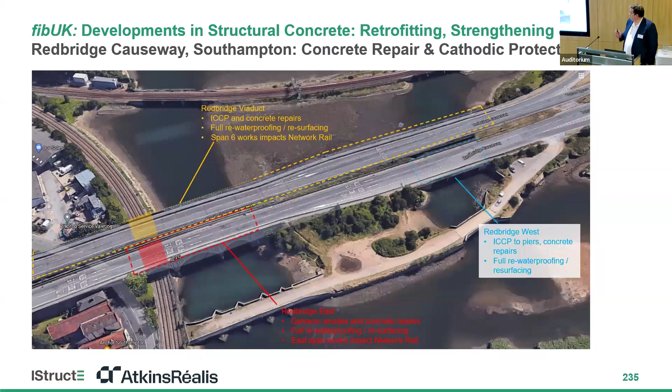Looking at the causeway itself, this is an aerial view. Southampton's to the left as you look at it, the New Forest to the right. So the main structure is Redbridge Viaduct - this is where we've done extensive cathodic protection and concrete repairs. We've also got Redbridge East, where we did galvanic anode protection and concrete repairs. And on Redbridge West, we've also done a full ICCP system to the piers and concrete repairs.

That's our compound - that's the only area available for our compound, so we're really constricted on land which we can use for the works. These are the two rail lines that we're bound by, just to make life a bit more interesting. And the client also wanted us to re-waterproof a fourth bridge at the same time.

Just going over the structures - the main structure, the biggest one, is a 20-span viaduct. It's a series of concrete beams, and the piers are continuous into the ground. We call them pile bents, where they come down the column, and that forms the pile foundation. Where those piers transition to on land, they become leaf piers with some post-tensioning, and that presented a number of problems for us when we do the cathodic protection.

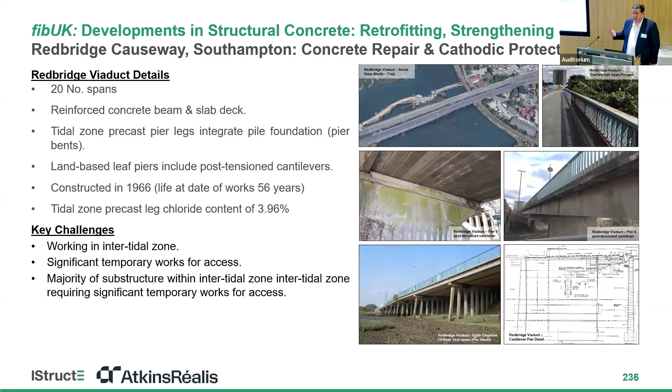The key challenge we faced is it was an early example of reinforced concrete construction on the south coast, and testing identified elevated chlorides in the pier legs. One of the key challenges is the part we need to remediate is in this intertidal zone with very fast flowing tides. So we need a lot of temporary works, which we'll show you in a minute, to address the works.

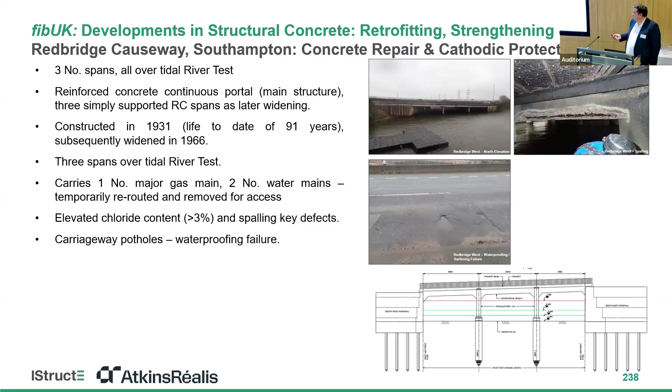Again, we've got major services and elevated chloride in the tidal spans. The final major structure is Redbridge West. As you can see from that top photo, there is no dry piece of land to get to it - it's all water-based work, making it more challenging. The majority of the structure is 90 years old, and the client was keen to extend that period. All the services on the other structures carry through on this one too. Same issues - elevated chlorides and spalling, and we had a number of potholes indicating the waterproofing had failed.

Just talking about the design challenges we had to overcome. The first one was actually getting to the structures to complete the work. As you can see from those two photos, there isn't a lot of dry land there, and that was one of our early considerations - how do we actually do the work?

With Milestone as ECI contractor, we developed a system of pontoons and quick demountable scaffold, which you can see in the top picture, which we could adjust as the tide came in and out, and that enabled us a much longer working window than just working at low tide.

The other issue we had is pontoons move - they move around with the wind, move around with the tide. So there's potential that when we're doing the breakout operation, a lot of debris would fall into the River Test, and that's really important because we've got the nature reserve nearby. So what we did is we developed a system of netting, which you can see in the bottom right-hand corner, to catch any debris when we were breaking out. Because that netting is flexible, it would move with the pontoon, going up and down with the tide.

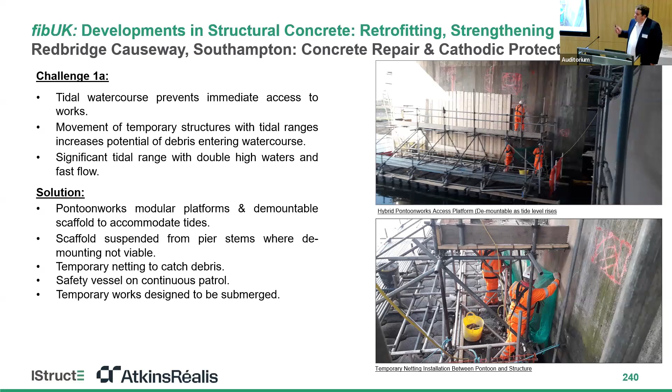The other issue where we couldn't use pontoons, we had to design the temporary works to be submerged, and we'll come on to show you some pictures of that. That temporary works design was particularly challenging because of the high flows that we had.

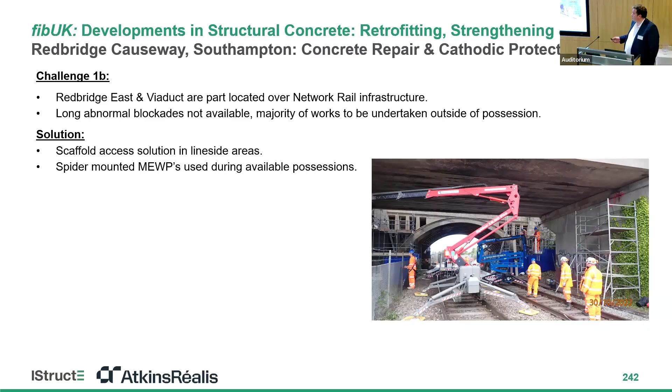The other issue we had was the working windows were very limited on the rail span, so we had to develop a way of getting in and out very quickly, getting the works mobilized and maximizing the possession window. One technique that we found particularly useful was the spider mounted MEWPs - if any of you have never used one, I highly recommend it on the railway, because they can be deployed and recovered very, very quickly, and they can adjust themselves to a range of different levels and ground conditions.

The next challenge we faced was that with all these different structures and the number of repairs we had, it was very difficult to identify how many overall details we would need. When we started counting them up, we were looking at thousands and thousands of different details we had to prepare, which isn't practical given the funding levels we get from our clients.

This was made even worse when we considered the phasing needed to maintain traffic across the bridge, and we also had to consider what the follow-on cathodic protection guys were going to do with their works. So there were huge numbers of details, with huge potential impact on the work if one of those details didn't work. One solution we came up with was developing a range of standard repair details which the contractor could adopt and then adjust to suit.

We also gave a number of standard rules for reinforcement replacement, again giving the contractor the freedom to make small adjustments on site so that you didn't need to interface with the designer, which would then slow down the works and cost a lot of money.

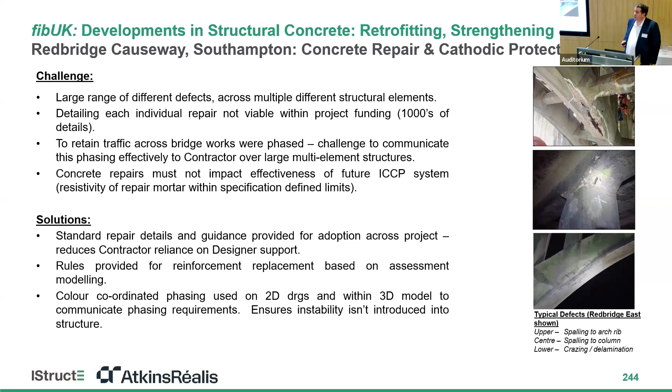And then just communicating the phasing of the repairs. As I mentioned, we have 70,000 vehicles running over the bridge each day, so we needed to do works in a staged order to make sure we didn't weaken the structure.

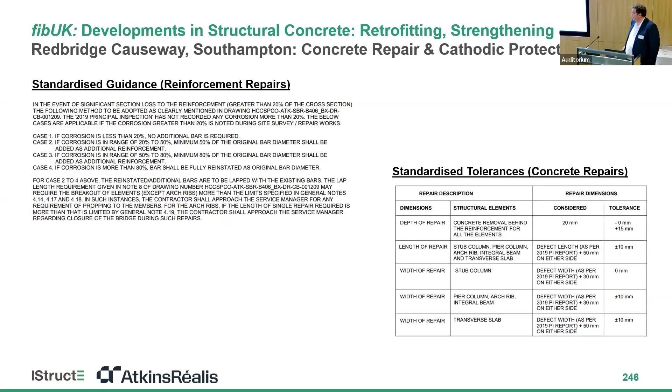So keeping everything standard reduced the amount of design information we had to produce, and it made it easier for the contractor to adjust things on site to his actual site conditions.

And then the final point was about communicating the phasing. With these giant structures with lots of complicated phasing, we had to come up with a solution for how to communicate that to the contractor.

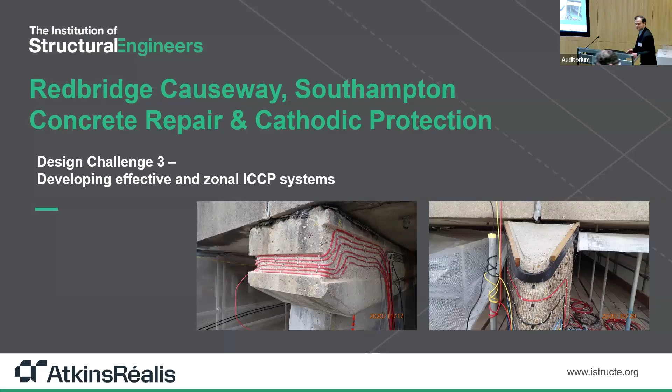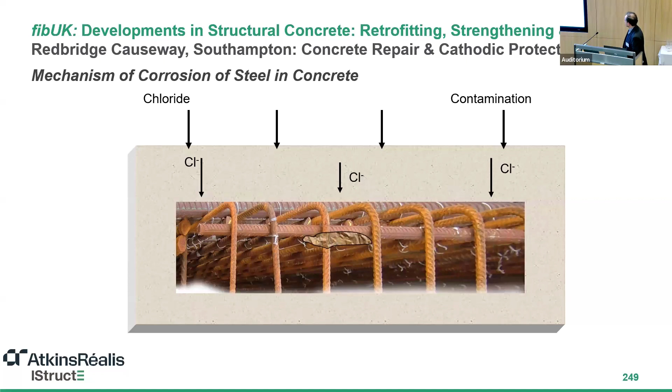As you may know, the steel reinforcement in concrete is generally protected by the alkalinity in concrete, and because of the formation of a very dense oxide layer. Once environmental elements like chloride and carbonation start to diffuse into the concrete, then the anodic and cathodic sites start to form.

On the anodic side, iron gets dissolved into the pore solution and releases an electron, and those electrons have to be consumed somewhere, which is the cathodic site. As a result, the iron gets dissolved and oxidized into different forms, and that's where we get expansive corrosion products, which is the main cause of cracking, delamination, and spalling in concrete.

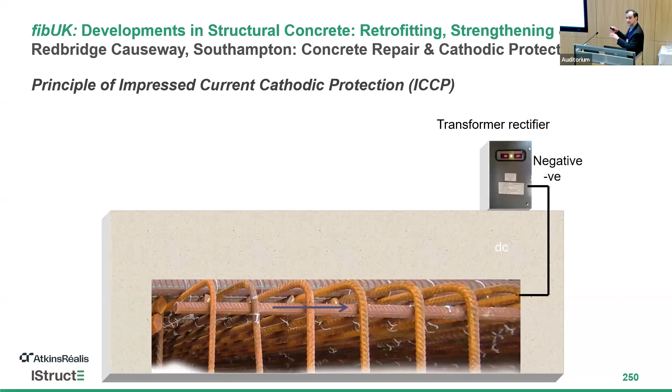So cathodic protection is an electrochemical technique, proven over the years and recognized by BS EN 12696 and also National Highways standards. It effectively works by applying a DC current within the concrete and around the reinforcement, trying to reverse those anodic and cathodic reactions.

We connect the negative side of the DC power supply to the reinforcement, and pass current using inert anodes - it could be titanium or a conductive coating, etc. The current flows from the anode, which is the positive side, to the reinforcement and back to the power supply. Effectively we are shifting the half-cell potential of the steel to the safe and immune zone.

Steel corrosion will be stopped or minimized, and the rate of corrosion will be reduced significantly over time. In order to prove the system is working and protection is provided, we monitor the CP system using probes like reference electrodes or decay probes, to maintain and monitor the system over time.

For Redbridge Viaduct, and any CP system installation, there are challenges. First, embedding all those anodes and cables within the concrete, whether chased or surface mounted, is a challenge. Breaking out the concrete to form chases for embedding tends to cause weakness in the structure. That's a challenge we need to face.

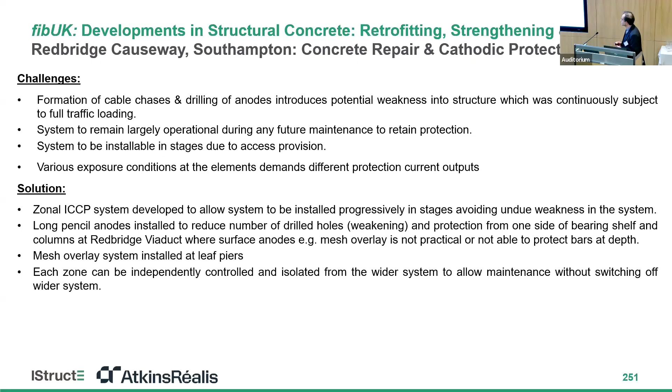For large elements like a leaf pier, we use the mesh and overlay system to avoid hand-arm vibration risk, which you may need hundreds of holes and drilling to be done. Each zone can be independently controlled and switched off as and when needed.

Also the bearing shelf, which was just below the joint and exposed to leakage, again had different current demand. The anode system for the bearing shelf was different, for example, from the rest of the leaf pier. Hence zoning was very critical for that structure.

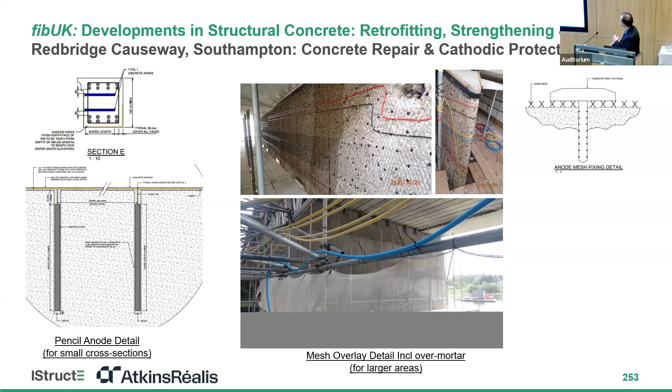Then the titanium mesh has been pinned using plastic pins to the surface. Once all the cables are installed, the whole thing will be covered in a sprayed applied mesh and overlay system, and the photo in the middle is the final product ready for energization and operation.

Again, regarding cabling, you could see the size of the cable chases that we had to cut. Also, in order to avoid delamination and debonding of the repair mortar within the chases, spacing between the cables was very important. Allowing for spacing and the number of cables to be chased is always a challenge, especially with low cover areas at the reinforcement, which we had to overcome.

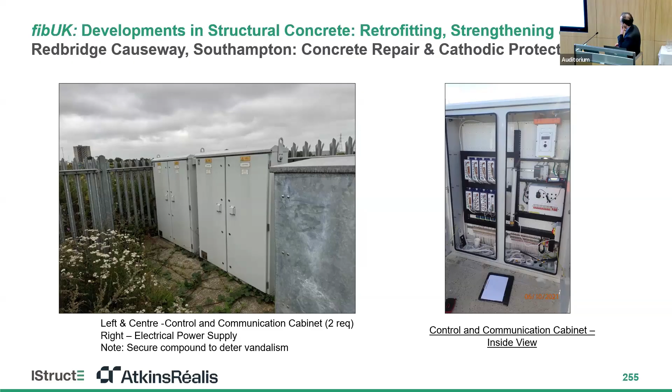You can log into the system, adjust the current, monitor the system, and control and maintain it. On the right-hand side, you can see the AC cabinet because the system is mains powered, so AC power must be supplied all the time for the system to operate properly.

One of the challenges we had at two piers of the structure was the interaction between the CP system and the high tensile PT system installed at the top of the piers. As you may know, high tensile strength, high stress steel can be affected by high negative potential.

The high potential can generate hydrogen atoms and molecules within the matrix of the steel, which cause fracture and sudden failure. So CP interacts with high tensile strength in a complex way, because on one hand it generates hydrogen and there's a risk of hydrogen evolution, but on the other hand it increases alkalinity around the reinforcement, which helps control this phenomenon.

As a result, there is a safe limit which has to be determined by testing the steel. For example, in this case it was Macalloy bars, but because of the condition of the system and the bars, and practicality, we couldn't take a sample and test it. Hence, the decision was made to reduce the scope of the CP system to avoid failure of the PT system.

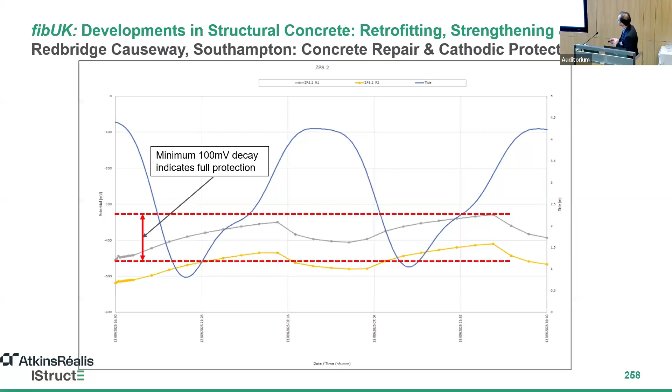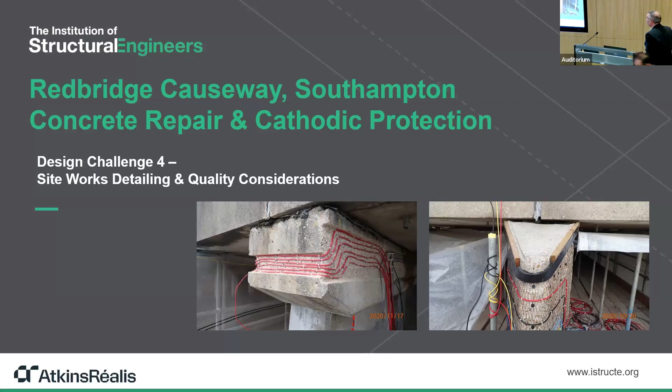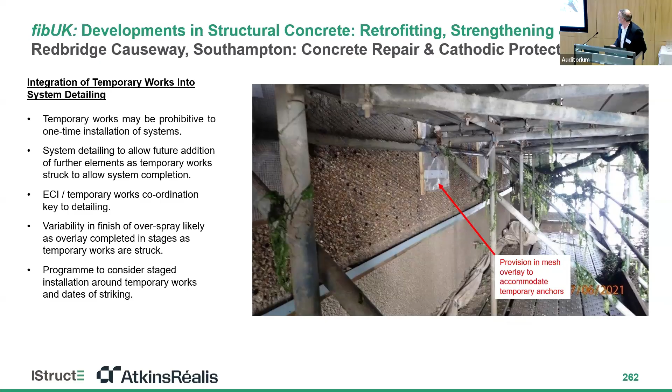And that is the finished product. You can see the overlay in different colors because of different phases of work, so some of the lighter material is a lot newer than the other.

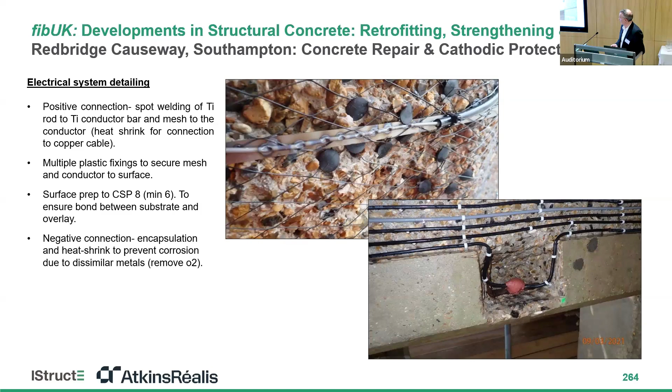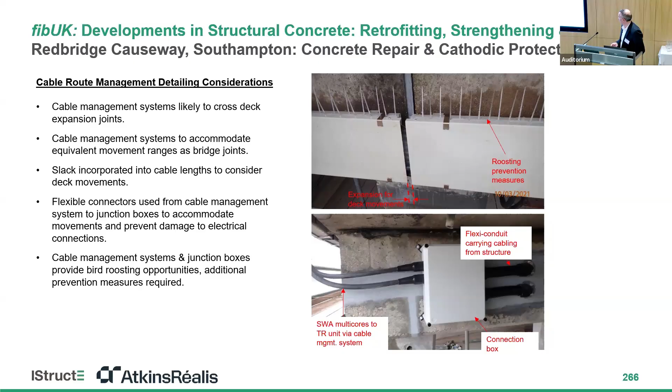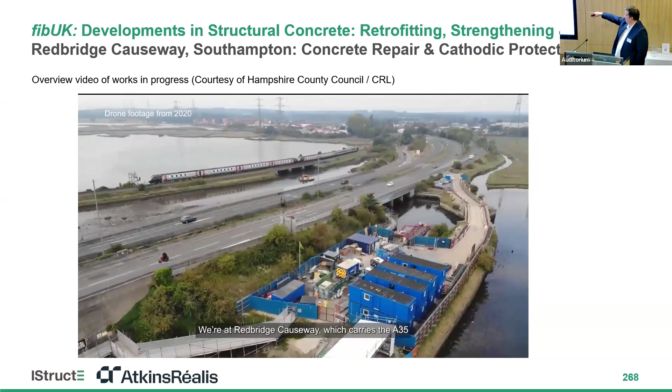We're at Redbridge Causeway, which carries the A35 in and out of Southampton. We've got 4 bridges at this location. The bridges themselves are actually getting on a bit now, 100 years and almost 60 years. They are showing signs from the harsh environment here. The salt water in the air has actually got through the concrete into the reinforcement which is embedded in the concrete. That then rusts away, and as it rusts it expands, and that actually pushes off the concrete.

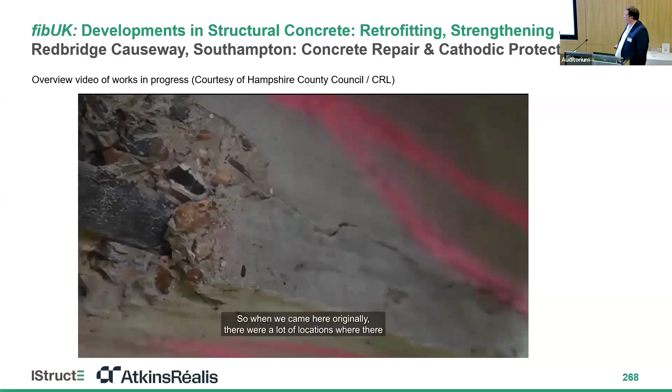So when we came here originally, there were a lot of locations where there was cracking, concrete had actually moved, and we could see the reinforcement. So we're actually repairing all of this, because if we don't, then the structure loses its capacity and we'll end up with having to put on permanent lane closures, and if we did nothing at all, then eventually the bridges would actually have to be closed.

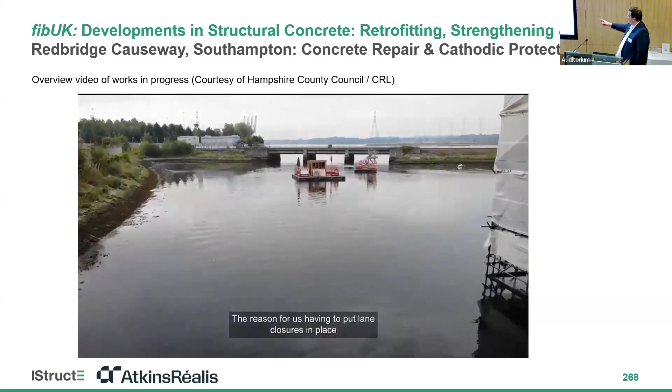So without doing any work, the bridges would fall down? Yes, gradually. The reason for us having to put lane closures in place across the bridge is why at the moment? Well, the bridge on the other side, built in the 60s, has a little bit more reinforcement, not as much as we would put in a brand new bridge these days, but these older ones built in the 30s have very little reinforcement within them. So as soon as that starts to go, we get problems with capacity.

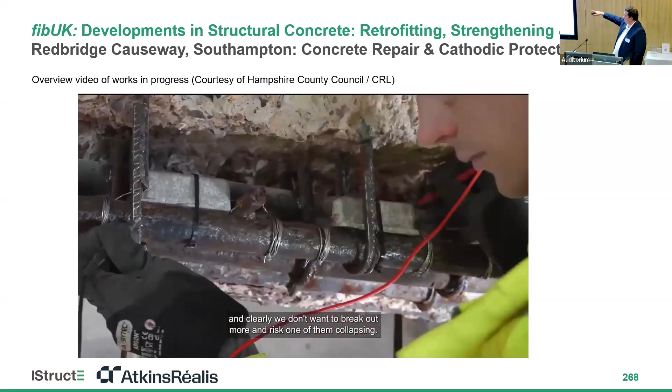All of our repairs have been phased so that we can keep traffic moving, but it's a much bigger challenge on this side because the bridges are much older, and clearly we don't want to break out more and risk one of them collapsing. So we've had to do it phased. We've had to release all the loading on it by putting it down to one lane of traffic going across. So put in simple terms, having too much traffic going across at the minute could endanger the bridge because we're having to take away some of the concrete to renew it. While we repair it, we've got to reduce the loading on it.

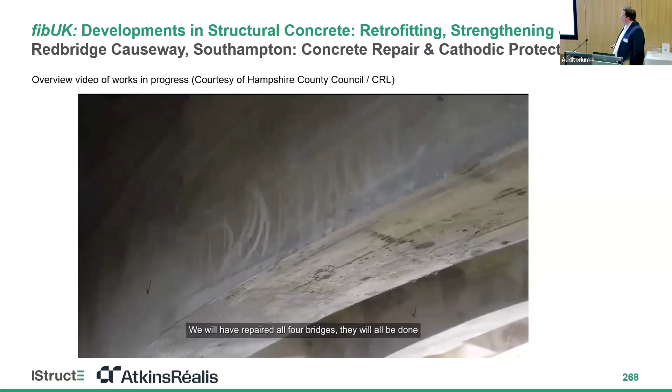When it's done, what is the outcome? What do we have? We've repaired all 4 bridges, they'll all be done, and the repairs will see it through for the foreseeable future. In the time it's taken, we could have built a new bridge. Could we? You certainly couldn't get in a new bridge. You would have to take these ones down. That would take the route out completely, and it would take many, many years to do that. It would also cost an absolute fortune to do it as well.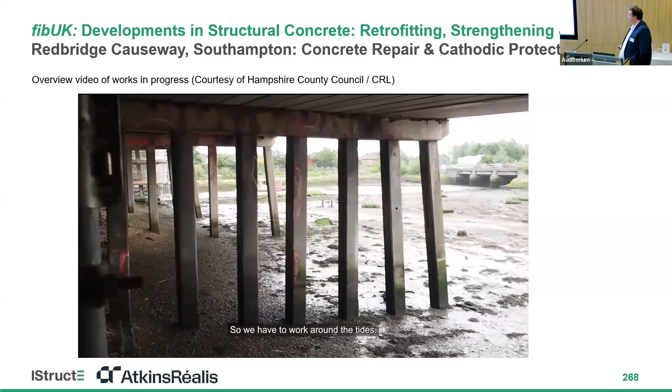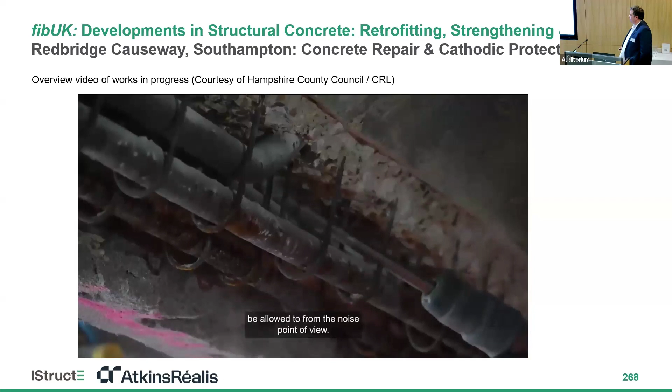This site actually poses an awful lot of problems, because we've got tidal water, so we have to work around the tides. We've had to do out of hours working, because obviously the tide changes all the time. We've got the railway just over there as well, and we need railway possessions for that. Some of those possessions are at night, so we do have to do night time working, but some of them are during the day as well, so we've had a mixture there. We couldn't work 24 hours because we wouldn't be allowed to from the noise point of view. But particularly at this end, we're very close to residential properties, and we have got it all shielded out, and we've got noise curtains up, but even so you can hear now the water jetting that's going on is a noisy operation.

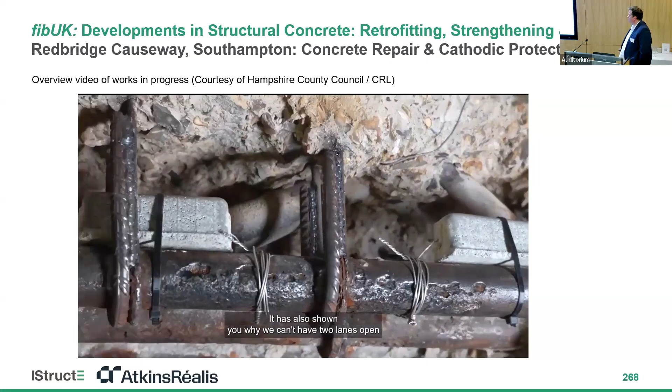Hopefully that's explained to you how important this causeway is and why we need to replace it. It also has shown you why we can't have two lanes open, but it is for a good purpose. At the end of this, we'll have a bridge that is fit for the future. So thanks everyone for your patience, thanks for looking for alternative routes, and thanks for sticking with us while we get this work done.

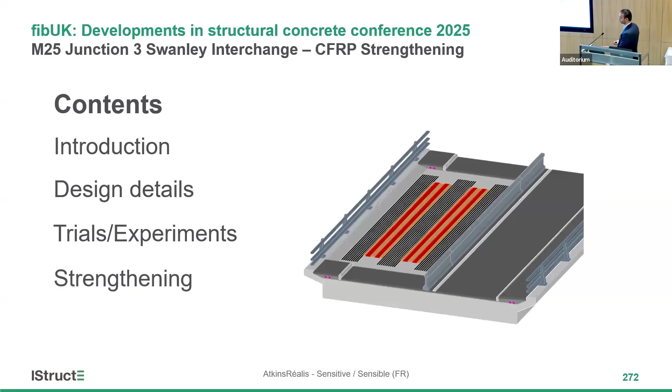So I've divided the presentation into five parts. Firstly, an introduction where I'll give a brief background about the requirement of strengthening, followed by the design details, then the trials and experiments which have been carried out for the strengthening which was to be applied on a live site, then finally strengthening followed by the conclusions from the work.

The structure was built in 1976, and immediately as soon as it was open, they noticed flexural cracks in the soffit on the back span and at the pier locations on both structures. So they realized, after doing investigations, that the structure was under-reinforced. So they carried out strengthening in 1977 using bonded steel plates at both locations, on top of the piers in the hogging regions and at the back span supporting the sagging locations.

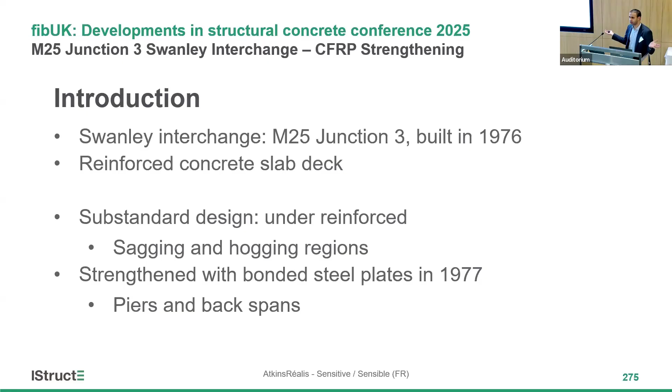According to current standards, CS 470, management of substandard structures, there were six-monthly visual inspections carried out on the structure. And in one of the inspections in 1994, they found that the infill mortar around the top plates was missing. And the fixing bracket, which holds the steel plate, was also missing. So repairs were done in 1995.

The following inspection in 2017 and 2018, they carried out some hammer tap surveys on the exposed plates to see if there's any debonding between the plate and the concrete, which confirmed the debonding, and there were evidence of surface breakups as well. So as a first step, there was an optioneering study carried out to see which type of strengthening needs to be carried out on the structure. There were multiple options which were explored, and I'm not getting into the details of this optioneering study, but FRP was chosen as the strengthening technique.

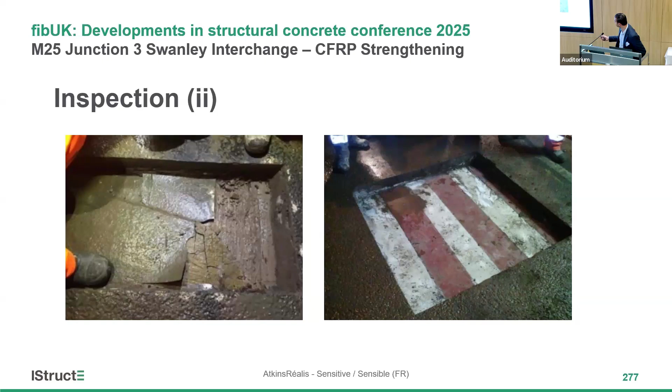Here on the left image, you can see the waterproofing layer peeling off from the surface, and this is the infill mortar next to the steel plates, which is having issues.

So the exact reason of this debonding is not confirmed, but we suspect all of this has contributed to it, which is the raised level of strengthening when the steel plates are installed on top of the concrete deck, which reduces the surface thickness. Improper grouting, as we saw in one of the images. Then absence of waterproofing around the plates, and also due to the hydrostatic pressure of the axle loads, which keeps accumulating on top of the steel plates. So all these reasons are the reason for debonding.

So as I said, an optioneering study was carried out, and then FRP was chosen as the technique to increase the structural capacity of the member.

Technical report TR55 is a design guidance for strengthening concrete structures using fiber reinforced composite materials. Two presenters today mentioned this TR55 in their presentation - one was John, and the other was a Professor from Bath. We use this in the UK for strengthening structures, and if some details are missing there, we look into FIB Bulletin 90, 14, and 40, of which Professor Sen is a contributor - he's contributed a few chapters in it.

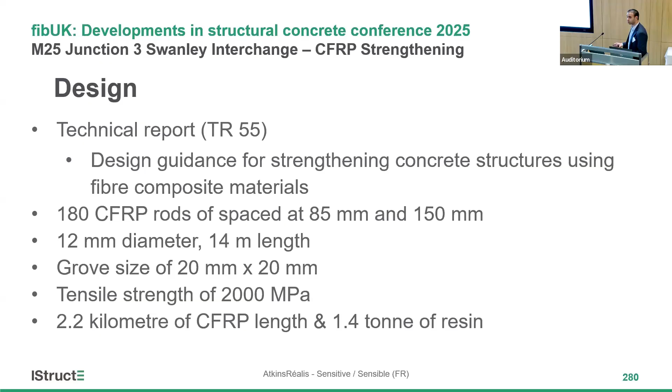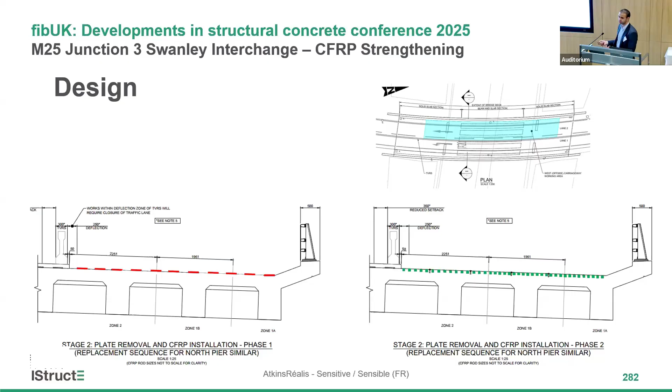So in the process of moving from left to right in the previous figure, there was plenty of experiments which were carried out by Octavius offsite trials. This was carried out in 2018.

What did this optioneering study involve? The first one was, do we need to use FRP plates or do we need to use NSM bars? The FRP plates are not that far off from the steel plates - the only advantage is that the thickness of this element is much lesser than the steel plates. Whereas as Professor Sena presented in the previous session, the advantage of using NSM is that it has a better bond with the concrete element, and it takes less time to apply on the structure. Whereas for the FRP plate, the surface preparation takes a long period of time.

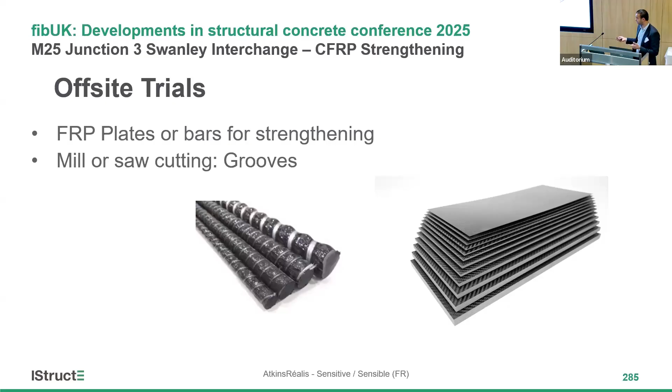The other trial was to see if we need to use mill cutting or saw cutting to execute the grooves for the NSM bars as well. Then for surface preparation, if we had to shot blast or just do smooth surface finishing of the concrete was enough - so we also carried out some pull-off tests on both surfaces. Then a hammer tap survey was also checked along with ground penetrating radar and ultrasonic test to see if we have any voids in the resin. Even though it's not a standard technique, we still tried to see if we could capture something, but we were unsuccessful.

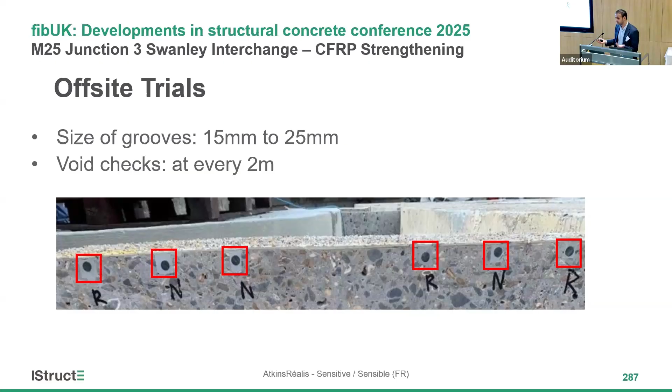We also explored the groove size varying between 15 mm to 25 mm, both in horizontal and vertical depth. Because we don't have any standard method to measure these voids, the next best option was to carry out destructive testing - you cut the slab, which has been prepared off-site, at every 2 meters or 3 meters, and check if you could find something. It was a positive result - there were no voids identified.

So considering all this, NSM bars were chosen for better quality, and as mentioned, it reduces the time span for carrying out the strengthening on site. This played a vital role because one lane of the carriageway was active when the strengthening was being carried out.

I know in the next slide there's one person who will be really happy, because he's been pointing out that the glass transition temperature is not being considered in the codes - so that's one of the tests. Due to the shortage of information, we had to check, especially because there are 2 layers of hot rolled asphalt which is going to be laid on top of the strengthened element along with the resin. This resin should not reach this glass transition temperature, because if it does, then it's not effective and participating in the load carrying capacity.

So what we did is we cast a 500 by 500 mm slab. A groove of 20 by 20 was executed and the strengthening was carried out.

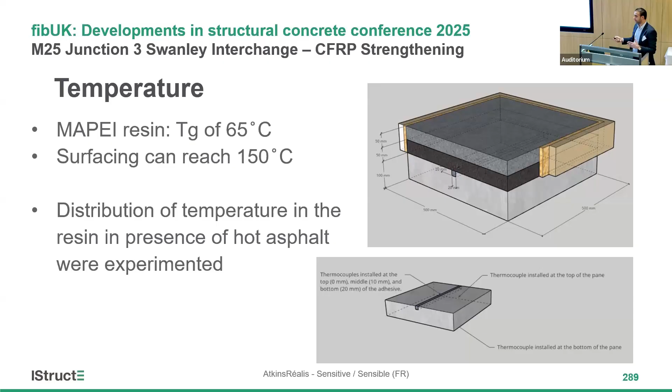After 24 hours, a hot rolled asphalt was laid. Before laying that, we had thermocouples installed on top of the resin, center of the resin, and at the bottom of the resin. Then a layer of waterproofing was applied, and one more thermocouple was installed on top of it.

And then a 50mm hot rolled asphalt was laid on top of this waterproofing layer. Then we waited till the ambient temperature was reached. Once it was reached, we laid another 50mm of the wearing course on top of this binder layer. Then again we waited for the ambient temperature.

These two graphs represent the results. The left graph shows the evolution of temperature along time when the binder layer is applied. The graph on the right shows the evolution of temperature when the wearing course is applied, which is the topmost layer. The particular curve we are interested in here is the gray one, which shows top of resin.

And then the yellow one is on top of the waterproofing layer. As we can see, the difference is quite high, which shows that the waterproofing is very effective in curbing this temperature. The top of the resin reaches close to 60 to 65 degrees for a very short period of time.

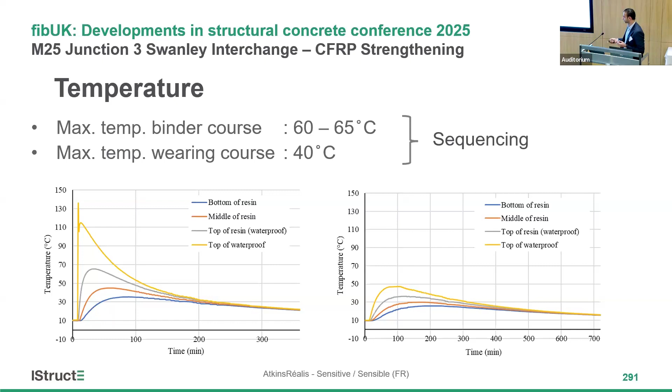So the solution was to carry out the binder course application in sequence, so that at least we have the minimum load carrying capacity on the bridge when the binder course is applied.

Once this binder course reaches the normal ambient temperature, you apply the next one, wait for ambient temperature again, and then close it off by applying the central one. In this way, you continue to carry the live traffic loading on the structure. Whereas when we had to apply the wearing course, it was not an issue as the maximum temperature reached was only 40 degrees.

Once we completed all the trials and were confident this could be executed on site, we moved onto the site. The first step was to set up site offices, storage units, get a TM Chapter 8 vehicle, survey and mark the extent of strengthening, monitoring equipment, and local grade baselines.

The second step was to remove the surfacing, where the pavement and the verge strip were removed to expose the strengthening plates. Then white lines were installed to identify where the steel strengthening was present and where it wasn't, as we saw in one of the earlier pictures.

Then we installed the temporary vehicle restraint system. A survey of strengthening plates was carried out for records to see the amount of debonding that we have.

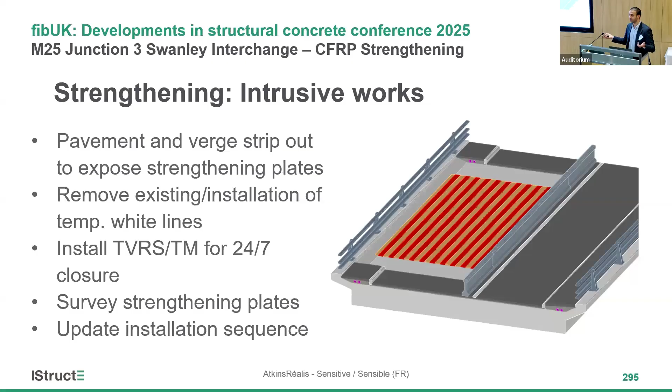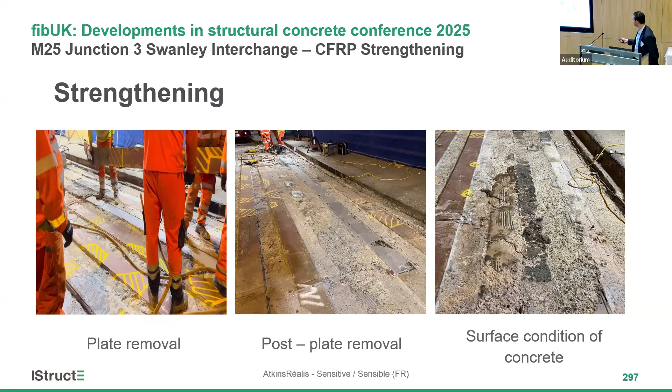Because we had to maintain minimum structural capacity of the structure, the strengthening had to be carried out in sequence as well, where only part of the plates were removed. At those locations, the FRP was installed, because this carriageway was live, carrying traffic.

So the condition of the concrete was inspected, and then the repairs were carried out as planned in sequence. These are the grooves which have been executed at those specific locations.

And it was done using this machine, which was specifically developed for the purpose. If we imagine executing 180 grooves, 14 meters in length, it's quite an ask to execute these grooves manually. We would also like them as straight as possible, because any inclination creates a local stress point on the FRP.

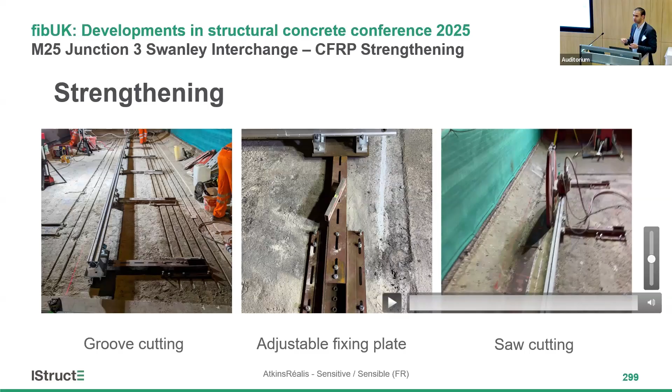Again, just a refresher, we have to move all the way from here to here. This is where we have completed executing the grooves with just 3 plates remaining in each section, so we have that minimum capacity in that section.

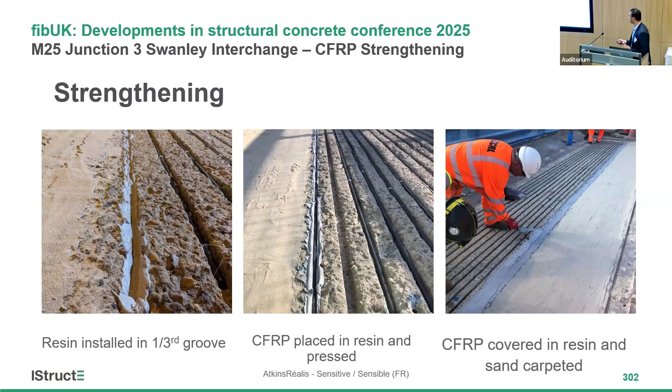This is the shot blasting preparation to make the surface rough, so we have a good bond with the waterproofing layer and the concrete surface. Just to check to see if the CFRP rod fits into the groove, and then you install 1/3 of the groove with the resin. You install the bar, and then you fill it up along with the sand carpet.

This is the completed first phase. And then we give a gap of 24 hours overnight, so the resin sets in.

And then this is the next phase where we are removing the central plate and the plates at the extremes. The same process is repeated: execute the grooves, this is the mixed resin, shot blast and apply the FRP.

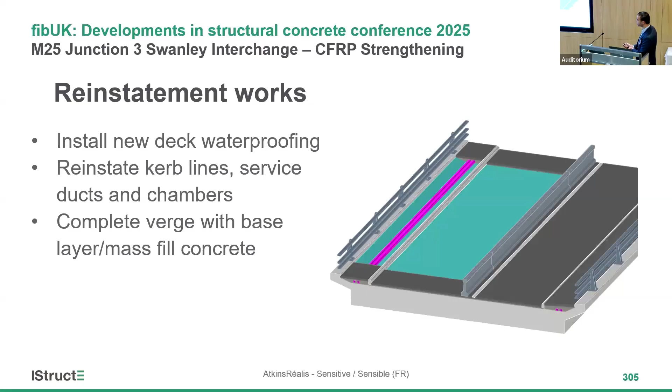Once the whole process is completed, then we install the new deck waterproofing, then reinstate the kerb lines, and finally complete the verge with base layer and mass fill.

For this case, we come for sequence application of the binder course, as we saw in the trials and experiment section, where only the central strip was applied with the binder course, and then you wait for the temperature to reach ambient, and then the other 2 sides were applied with the binder course, whereas for the wearing course, it was applied in a single go.

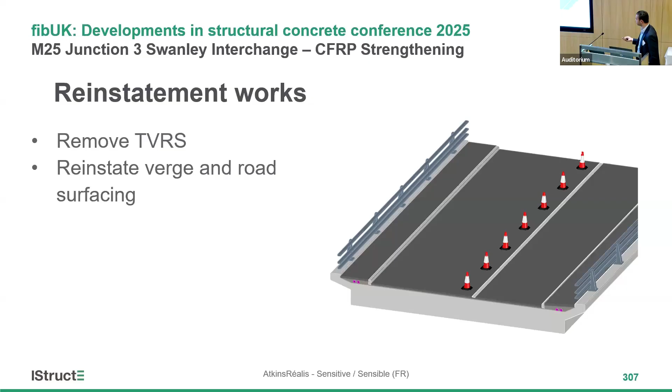Finally, remove all the TVRS, or temporary vehicle restraint solution system, then reinstate the verge and the road surfacing.

Refresher again. Step 1: mark out all the extents, remove the surfacing, check for the plates, remove part of the plates and install the FRP, followed by remove the remaining plates and install the FRP. Then once it's all set, apply the surfacing and then the markings.

So we finished one side, it was open to public, and then we repeat the same procedure on the other side.

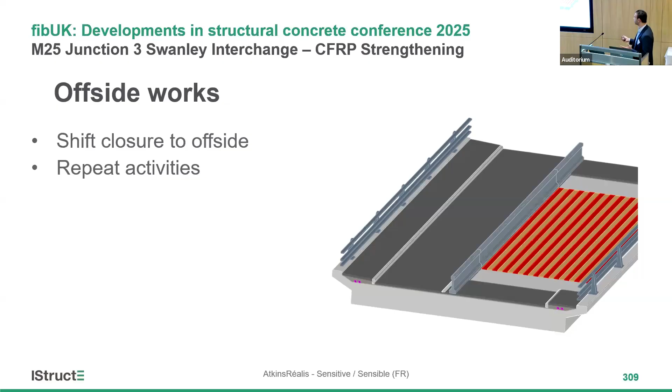But in this case, we move from here to here again. Just a comparison of both the figures, where you can see here the strengthening is done, whereas here, just the FRP plates have been exposed.

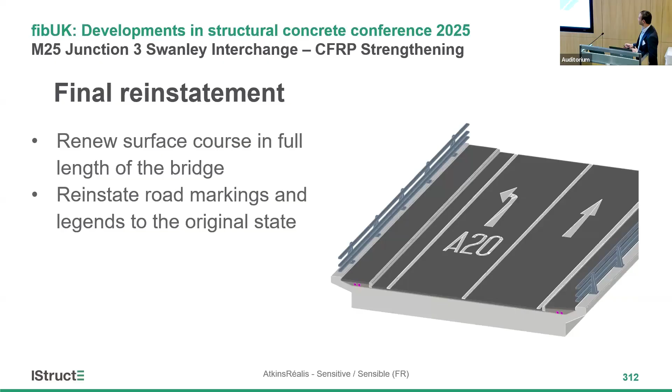And this is the initiation of stage 2, and then the same procedure is repeated again, and all the road markings are back to the original state.

So in conclusion, strengthening was successfully executed in 90 days.

Challenges we faced: multiple, but to point out, one lane was open during strengthening, so there was less disruption to the public. Glass transition temperature of resin was one of the challenging ones. There was compatibility between the resin and the waterproofing with kiln-dried sand, which improved the adhesion. Our client was happy with the executed works, and we published a paper in the SMART conference in 2024.

So with this, I come to the end of my conclusions, and I'm open for questions.

So our next and final speaker today is Jan. Is it Jan or Jan? Jan Anil. Sorry, I should have asked you before.

Jan is a structural engineer at Buro Happold, who has developed a specialism in the forensic assessment of existing RC frame buildings, and in particular, issues related to punching shear and transfer elements. This has included the use of advanced nonlinear analysis simulations in collaboration with specialist firm ASDEA. He has extensive experience in remedial strengthening design methods, including through bolts, RC jacketing, and externally bonded reinforcement plates, to name but a few.

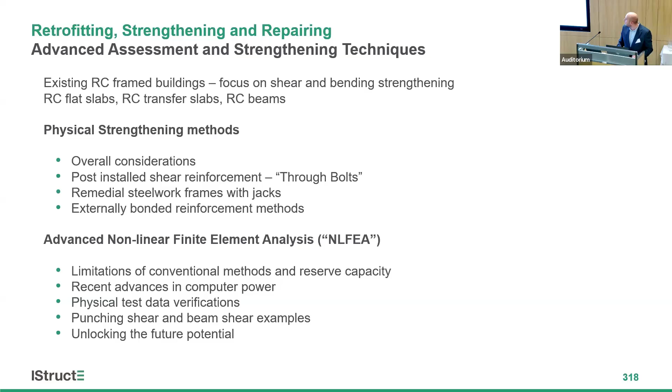So why is all of this important, and why do we go above and beyond in terms of analysis to optimize these remedials and avoid them? There's a growing demand to reuse buildings and expand the lifespan of existing building stock. There are also lots of defects in existing buildings, which I can't give specific details of, but they need rectifying, and this is something I've been dealing with a lot. There's also the Building Safety Act and sustainability drivers playing a role in all of this.

At the same time, there's growing computer power and emerging research in advanced strengthening and assessment methods. Given the high costs of interventions in existing buildings, this warrants harnessing this power as an industry.

So I'm starting with some typical strengthening methods, three common ones: post-installed shear reinforcement, typically threaded bars installed through the thickness of the slab. Other strengthening includes installing steelwork frames to add additional support, and these are normally jacked to engage them in that support. And people have already discussed this a few times, but externally bonded reinforcement techniques.

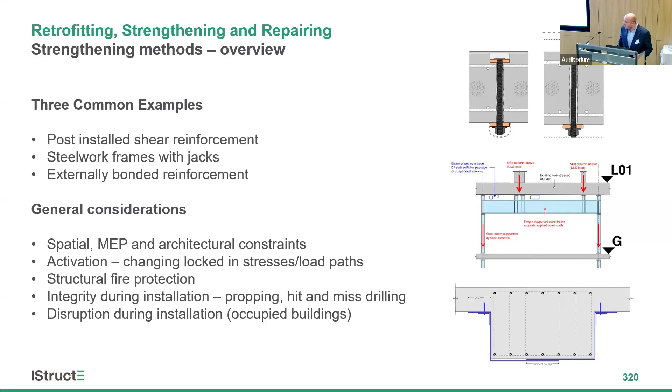And then there are some other general considerations with regard to limiting disruption in existing buildings with noise and dust, maintaining fire escape routes during the work, figuring out how to deliver all the steelwork into the building, how many splices you need, etc.

So through bolts is probably one of the most common methods I've seen for strengthening slabs for punching shear. There are different configurations that can be used, such as some of the examples shown on the slide.

The most common one is referred to as a through bolt, but normally it's a threaded bar, which is drilled through the full thickness of the slab. This is mechanically anchored by bearing plates on the top and the bottom. And you can preload these by using a calibrated torque wrench to preload the bolt and actively engage it.

Normally for fire protection, the top is protected with a fire mortar or a screed poured over the top of the bolt. The bottom part of the bolt can sometimes be fire protected with these special ceramic caps, which are simply screwed on the end of the threaded bar. They are easy to install and could be concealed in the ceiling, such as shown on the picture. Otherwise, you need to use something like fireboarding, but that can be much more difficult to install.

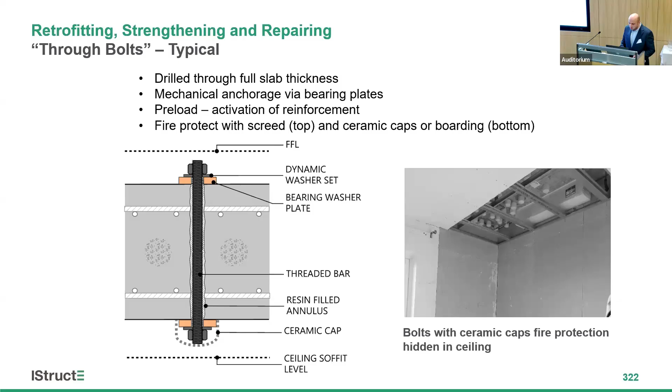Sometimes it's not possible to have the bolt go all the way through, for example if you don't have any floor finishes or you have a lack of floor build-up. Sometimes it's possible to use a recessed bolt head at the top, so the top washer plate is actually recessed within the thickness of the slab. To preload, this can still be done. You can incorporate a locking key device to hold that top plate in place within the recess of the slab while you preload.

This is an obvious advantage where you've got no floor finishes. The acoustic layer, which you often have between the floor finishes and the top of the slab, can be maintained in place.

One drawback is the fire protection is not really a standard detail, and it may be necessary to carry out performance-based fire analysis, such as CFD, like heat transfer analysis, to show that the fire protection can work. Sometimes it's fire protected with fire mortar also recessed within the thickness of the slab.

Sometimes it's not possible to access one side of the slab at all, or it's just not viable. For example, if you're strengthening a slab at the top of a tall building, or if there's lots of floor finishes, it's just not practical to install the bolt all the way through.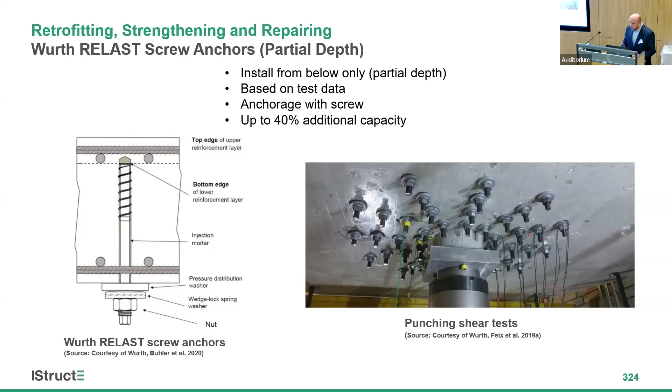Some general considerations regarding installation. A key challenge is avoiding the reinforcement. I recommend scanning the reinforcement with two methods, both ferrous scanning and ground penetration radar together. This allows both methods of scanning to be cross-checked against each other to get a better estimate about where the reinforcement is located. You need to consider the accuracy of the scans, the reinforcement congestion, and the spacing of the bolts to inform how much tolerance you need.

It's recommended to allow for additional bolts in case you need to shift stuff on site. And I discussed it before, but you may need propping, or you may need to consider a safe way of installing the bolts if you don't prop it. For example, you could limit the amount of holes you drill at any one time and keep the holes far apart from each other at any one time, and possibly work from further away from the support first, install those bolts first, and then move inward towards the support.

Through bolts are a good option as they don't affect the space very much, but sometimes they can be very noisy and disruptive to install, and sometimes they're just not viable.

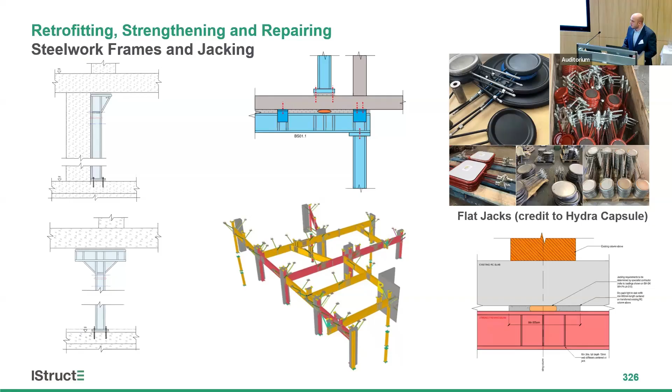For both steel plates and CFRP, they are bonded with resin adhesive, which has a low limiting temperature, and this needs to be considered quite carefully. If you need the externally bonded reinforcement plates to work in the fire, you need quite a lot of fire protection, probably about 100 millimeters of fireboard, and normally that requires a secondary structure to support it, and it's quite difficult to implement.

Another approach, if you do not need the externally bonded reinforcement to work in the fire, is you can focus your fire protection on protecting the existing slab, so that the slab works independently of the reinforcement plates in the fire case, considering reduced factors of safety in the fire limit state.

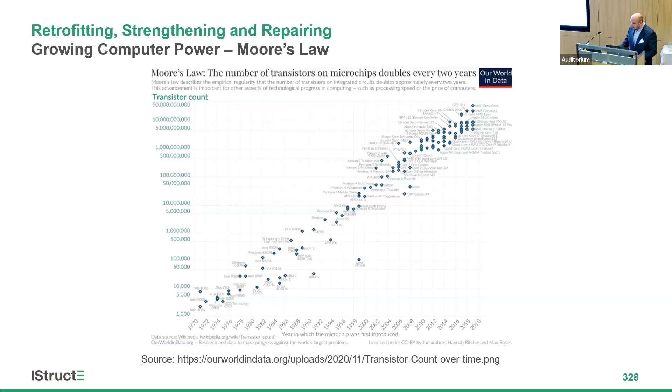At Buro Happold, we employ a specialist sub-consultant called Astia. They are experts in nonlinear finite element analysis. They use a software called Scientific Toolkit for OpenSees, which produces a graphical user interface for the OpenSees software framework developed at the University of California, Berkeley. Basically what this does is take the OpenSees software framework and allow you to visualize all the inputs and outputs and set them out more clearly in order to harness the full potential of the OpenSees software.

I don't know if anyone in the room is familiar with OpenSees or STKO. We can discuss that at the end, but it's very powerful.

So this powerful software can model very complicated nonlinear effects, nonlinear constitutive material properties, complicated stress-strain curves, cyclic effects. I'm not an expert on this and I won't go into detail, but it is very state of the art.

It uses what's called an implicit-explicit solver, where at the structural macro level it uses an implicit solver, and at the micro material level it uses an explicit solver, and combines the two to create a more efficient and stable solver.

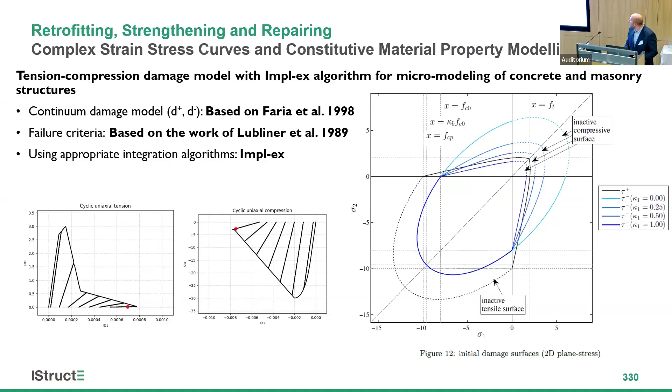The nonlinear analysis is not confined to the limitations of conventional analysis. For example, it can much more accurately model compressive membrane action and account for this benefit on the punching shear and bending capacities of RC slabs.

It can also correctly model triaxial confinement in compression struts. This is very useful, for example, where assessing a transfer slab with closely spaced misaligned columns, which have an inclined compression strut between them.

Using simplified strut and tie methods in normal codes of practice, often you have to make conservative assumptions with regard to transverse tensile stresses and the isostatic behavior of the strut, whereas these conservative assumptions are removed by actually modeling the correct triaxial stress state of the strut with the nonlinear analysis.

Compressive membrane action and its benefits on bending and shear capacity have been well known for several decades. An example of a physical test carried out by Vecchio and Tang in 1990 showed 30 to 40% additional bending capacity in the particular slab that they tested.

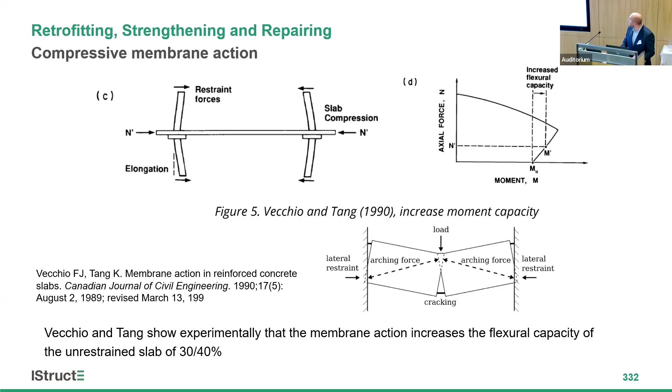I noticed in the second generation of Eurocode there's a provision for accounting for the effects of membrane action on the punching shear resistance. However, it's still very simplified and conservative compared to directly modeling these effects with nonlinear analysis.

Relying on this complicated analysis, it is necessary to verify that it gives an accurate result and that it is aligned with physical test data. So Astia have taken some open source test data, as well as laboratory tests they've been involved with themselves, and managed to replicate these tests.

Provided that the material properties, boundary conditions, and loads are all known, the nonlinear analysis can predict the progression of damage and the ultimate failure in punching shear with reasonable accuracy.

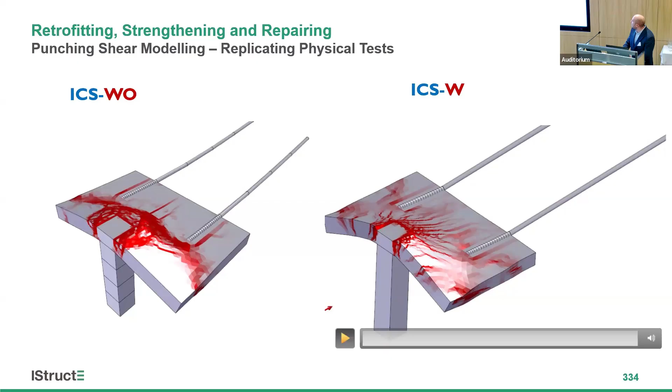The graphical user interface is also good for visualizing the strains, crack widths, and damage in the various materials within the structure. For example, you can see which longitudinal rebars are engaged and what level of strain they're experiencing. You can also see which links are most effective at resisting the shear and which are less effective, giving a better understanding of the behavior.

Punching shear capacity is governed by shear crack localization, which in simple terms is the stability of shear cracks which precede failure. Nonlinear analysis can model the progression of these shear cracks before they become unstable, and these are monitored as part of the analysis to estimate shear capacity. Throughout each time step, the dominant shear crack is monitored, and any abrupt increase in its opening is identified as a potential instability.

The shear cracks are limited by values based on test data. For a slab without links, this is normally between 0.3 and 0.4 millimeters, and for a slab with links, it's between about 0.6 to 0.8 millimeters or so. This is all based on physical test data that formed the basis of critical shear crack theory, but the nonlinear analysis can model these cracks and how much they're opening to make a judgment, normally done conservatively, about the ultimate shear capacity, and identify the point that precedes punching shear failure.

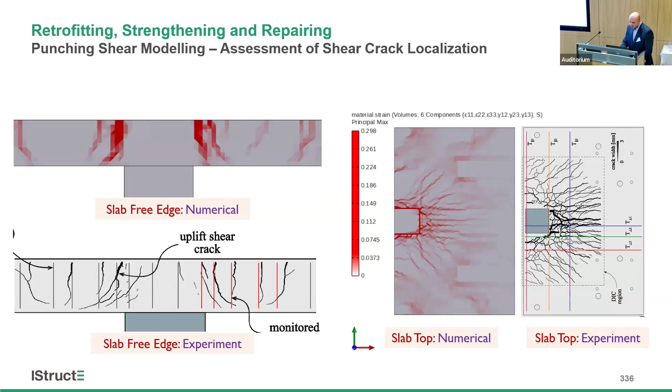The nonlinear analysis can be used to model transfer slabs and better understand their behavior and capacity. Normally, nonlinear analysis shows additional capacity compared to simplified conventional methods. However, this example shows that between the misaligned columns at the edge of the slab, most of the stress is very concentrated in a really narrow band of slab. On the left-hand side, you can see two shear links engaged.

This modeled slab actually has lots of shear links, designed in a conventional array, not really appropriate for transfer slabs. If there's a question about the behavior, the nonlinear analysis can more definitively describe the actual behavior and demonstrate whether there is a real issue or not, and whether strengthening is actually necessary. If it's required, we have the evidence that it's required, and if it's not required, by doing more detailed analysis you can save quite a lot of money and disruption.

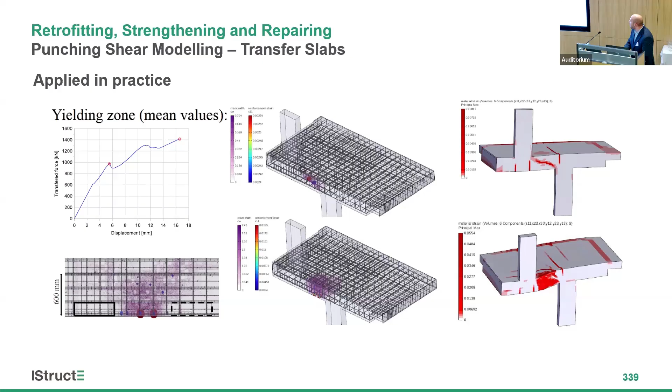These are just further animations of modeling transfer slabs. You can see the progression of damage, and you can also see how the links are engaged to prevent the propagation of shear cracking.

So visually, it's quite powerful.

This is not something I've been directly involved with, but I thought it'd be worth including. The nonlinear analysis can be extended further by combining it with monitoring of a real life structure. This is called digital twinning. A physical structure is modeled numerically, and then this is monitored, for example with crack monitors, and that monitoring information is fed directly into the analysis model, which effectively creates a twin model of it. It's like having a brain that can sense what the structure is doing in terms of movements, cracking, temperature, etc.

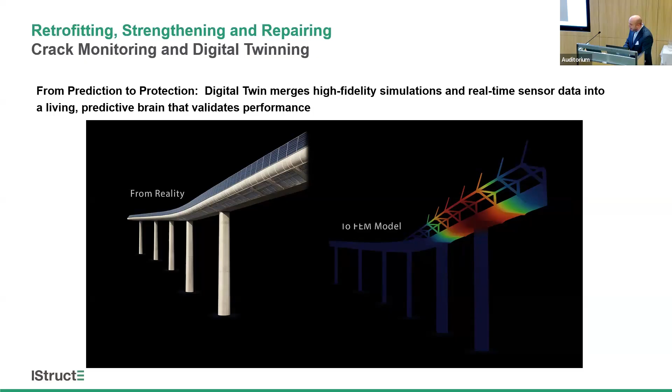This can be used in research, for example modeling of a half joint. It can be used to create a numerical model that's able to predict the failure and align this with the laboratory data and the monitored cracks.

So this is the same half joint, and you can see the cracks that were measured in the laboratory tests, and you can see that the nonlinear analysis is able to replicate these. So in this case, crack monitoring was used on the live specimen, and that was fed in to help predict the formation of cracking. And then that was used to predict the failure of the half joint.

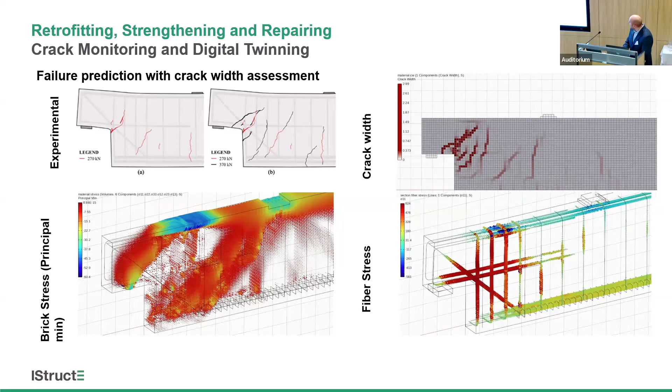And this is another example of a half joint, but this time in a live bridge. The monitors here included accelerometers, inclinometers, gyroscopes, and a thermometer. And the movements of the cracks were monitored in real time, and the trends of the crack opening and closing were reviewed in conjunction with some numerical modeling of the half joint.

And this together was used to demonstrate that the crack width limits were met and the observed cracks were within compliance. I believe this kind of method is becoming more common in bridges. It's not really used in buildings.

However, there is an opportunity in a building, for example, where a remedial is required and you're not able to install that remedial immediately due to licensing issues or other legal issues. This kind of monitoring could be useful to monitor that live structure and ensure it's behaving in the expected manner and not approaching something that indicates potential failure. That's a way of potentially mitigating the risk in the interim period before the final strengthening can be employed.

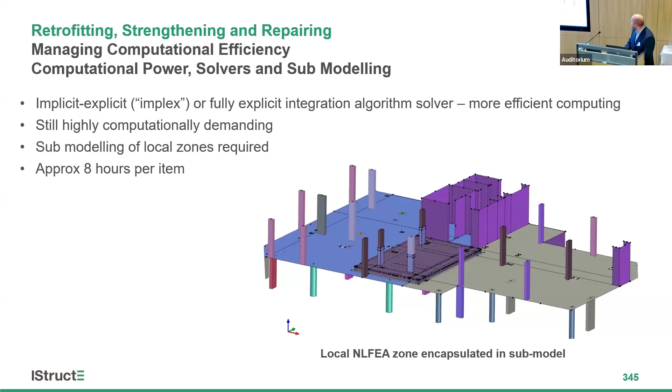In terms of unlocking the potential of this as an industry, I can see this becoming more common as the benefits of it are realized. It is a very niche area and requires someone with very highly academic expertise and a lot of experience. But the number of specialist consultants able to provide this is likely to grow.

The fib is uniquely placed to make this successful and make sure that this is used in the correct way. The Fib Model Code 2020 committee, which I understand IStructE are a part of, are developing more standardized methods, including some potentially more simplified methods that could be employed more widely. They are also looking at producing clearer and more detailed guidance on how to use nonlinear analysis, and looking to standardize the methods and workflows a bit more across the industry. And I think this is something the institutions will play a key role in.